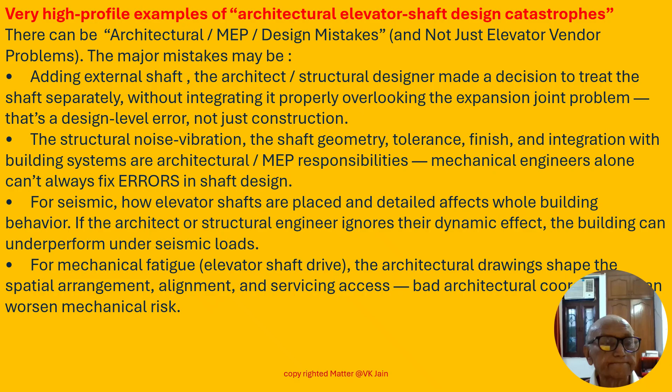Friends, architects, structural engineers and MEP engineers. Architects can also make mistakes. We'll take up a very high profile example of an architectural elevator shaft design catastrophe. The 47-story luxury Intempo Tower, Benidorm, Spain was once upon a time touted as the tallest residential building in the European Union with its 47 stories, a 188-meter tall building. The architects forgot to put enough shaft for the lift.

The notorious mishap was caused by a mixture of greed and incompetence. Now this greed is very important because the owner of the building, out of greed, asked the architects to hurry and start the building. They start collecting funds from different parties and later on, if they don't get enough funds, then they try to increase the height.

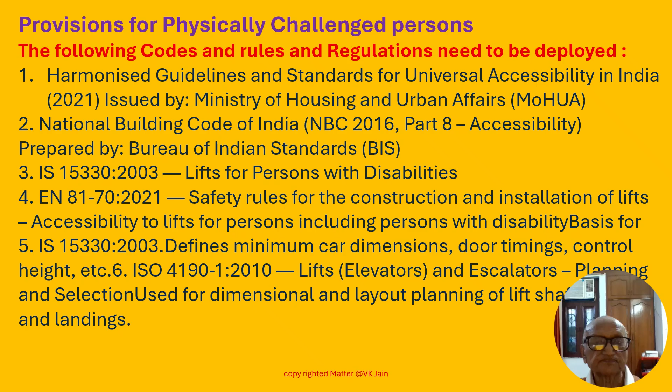Friends, let us discuss one by one what are the provisions for physically challenged persons to be made in elevators. The first one is elevator location and access. In this, we are supposed to consider proximity. The lift should be placed so it is easily accessible from the main entrance, connected to barrier-free routes. The route should be barrier-free because the physically challenged person may have to go on a wheelchair. Approach: minimum dimension could be 1500 mm by 1500 mm clear maneuvering space in front of the elevator door for wheelchair turning.

Third one is level landing. Approaching the lift from anywhere, the landing should be leveled properly. Floor level at the landing and car entrance must be flush, no step or gap more than 12 millimeters. Second consideration, car dimensions, that is cabin size. Minimum internal clear dimensions vary by building type. For residential buildings, minimum car size must be 1100 mm width and 1400 mm depth. Public or institutional buildings: minimum car size must be 1600 wide by 1500 deep for comfortable turning. Hospital and stretcher lift: 2000 width and 1400 depth for full stretcher consideration.

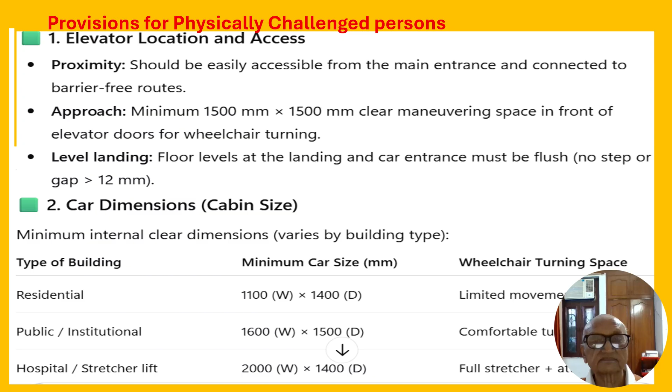Friends, MEP engineers, we are discussing the provisions to be made for a particular lift to be used by physically challenged persons. The third item is with regard to doors. Door width should be minimum 900 mm clear opening to allow wheelchair entry. The operation of the lift should be automatic. Timing: door open and close timing must allow sufficient duration for wheelchair and slow users, minimum 5 seconds. Sensors: infrared curtain sensors are to prevent the door closing during user boarding the lift.

Control panel design. The lift is provided inside or outside with a control panel. There is a limitation regarding the height. Controls should be between 900 mm and 1200 mm above floor level to reach from a seated position, that means for a person on a wheelchair. Layout: a horizontal or vertical arrangement with large tactile buttons, greater than or equal to 20 mm diameter. Tactile and braille: each button labeled with raised tactile numbers and braille. The tactile numbers on the elevator control panel are raised, touch-detectable digits that allow visually impaired users to identify floor buttons by feeling them with their fingers, without needing to see them. By virtue of the Braille system, blind people can feel the numbers, but of course, they must have been trained in the Braille system.

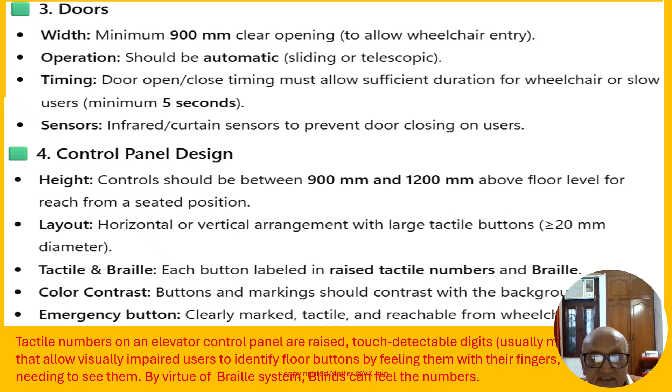Friends, the physically challenged person may be deaf also. For deaf, we have to make auditory and visual indicators: floor announcement, audible voice announcement for floor numbers and door opening and closing. Second, visual display, bright LED or LCD floor indicator inside and outside the car. Emergency communication system, two-way voice intercom with visual indicator showing that help is on the way. Third, fourth item, alarm signal, both visual and auditory alarm.

Next is handrails and support. Handrail must be provided on three sides of the lift, excluding the entrance. Handrail height should be 900 mm to 1000 mm from floor level, or at least on one wall. Shape circular or oval cross section, 30 to 40 mm diameter. Ends should be rounded and not projecting into circulation space. The handrails are necessary to give support to wheelchair persons.

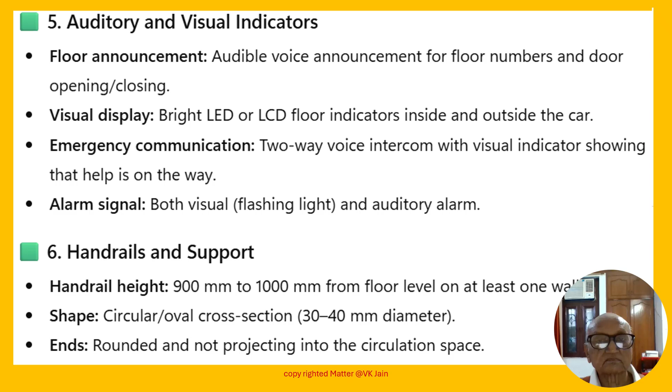Friends, we are discussing the provisions to be made for physically challenged persons. The seventh item is with regard to flooring and threshold. Non-slip surface inside the car, no step between landing and car floor, tactile warning tiles at the landing for visually impaired users, 300 wide strip before the door.

Regarding signage, there should be high contrast raised text near each landing and inside the car. Floor number should be in braille and tactile form. Accessible symbol should be displayed on accessible elevators.

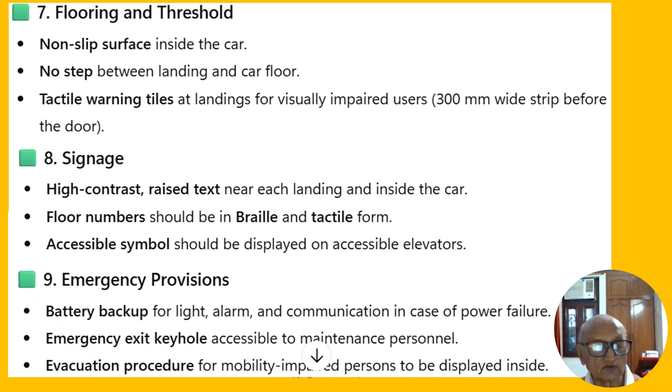Ninth item is emergency provisions. For emergency, battery backup for light, alarm and communication has to be provided so that in case of power failure, they come into operation. Emergency exit keyhole accessible to maintenance personnel. Evacuation procedure for mobility impaired persons to be displayed inside.

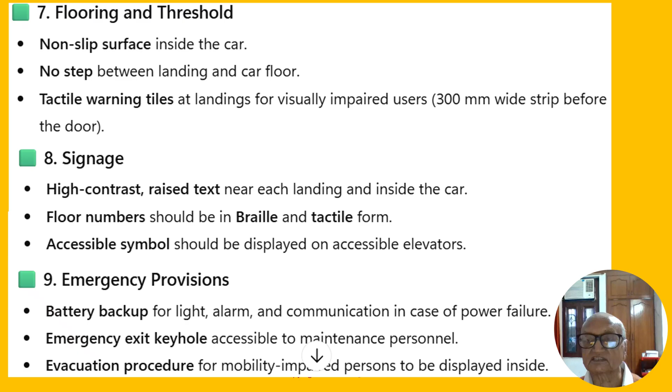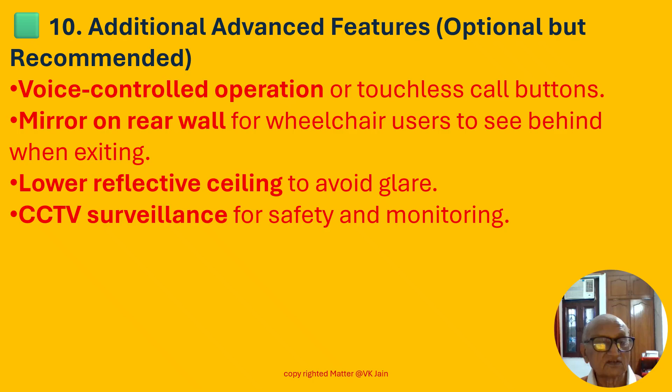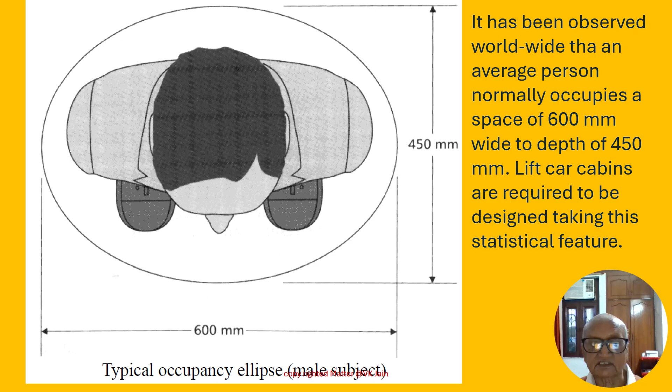This slide shows the space occupied by an average person, statistical average person. Statistical average person all over the world is taken as 600 by 450 elliptical space, although for consideration it becomes rectangular. This is known as the typical occupancy ellipse. It has been observed worldwide that an average person normally occupies a space of 600 by 450 deep. Lift car cabins are required to be designed taking this statistical feature.

There are two major design features of any lift system. They are handling capacity, otherwise known as quantity of service, then interval or waiting time, which is known as quality of service. We will learn this in the third section on lift.

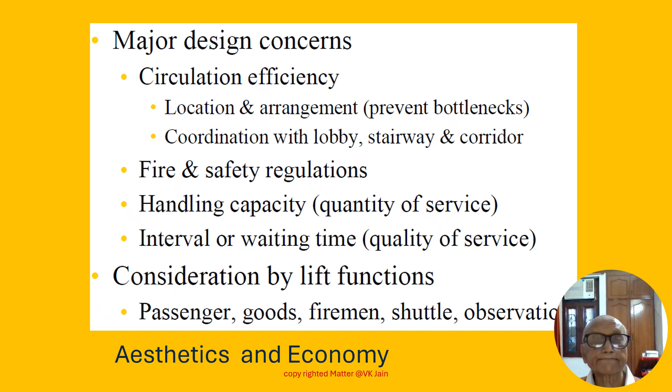This slide shows the energy efficiency apparatus or feature of the lift. We are supposed to provide regenerative type of electric drive. The regenerative drive is the latest upgrade which enables power generation during stopping of the elevator. Unlike conventional drives which heat a resistor while dynamic braking, regenerative drives generate useful power which can be used by other lifts, electrical equipment, or also can be fed back to the grid. At the same time, they are designed to ensure efficient braking of the elevator due to codal requirement.

Also, power generated by this drive has very low harmonic distortion. This system is designed with this feature also. The regenerative drive also offers multiple protection functions such as overcurrent and short circuit protection, over temperature protection, and also abnormal power voltage protection.

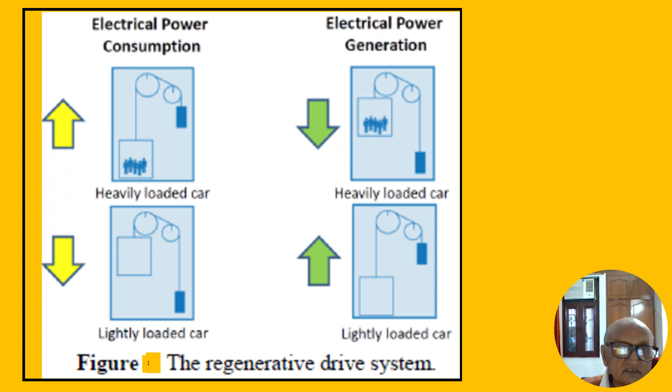Dear friends, this graphical representation compares four different types of lift systems, and each type has three distinct loads for energy consumption. The green one is showing car lighting. The blue one is showing power or energy consumed by control systems. And the third one is energy consumed by machine and drive.

Now let us see the most energy consuming type of system known as hydraulic system. The second one is a geared system, which is better with respect to the lift passenger not getting jerked during travel, but energy-wise it is second highest.

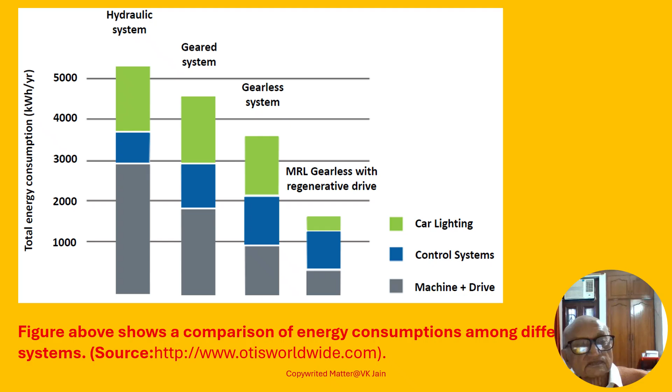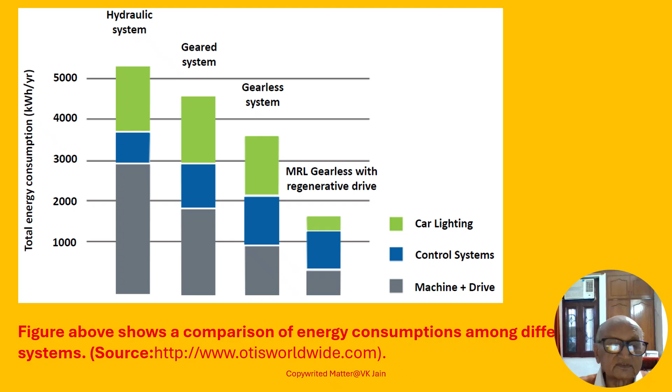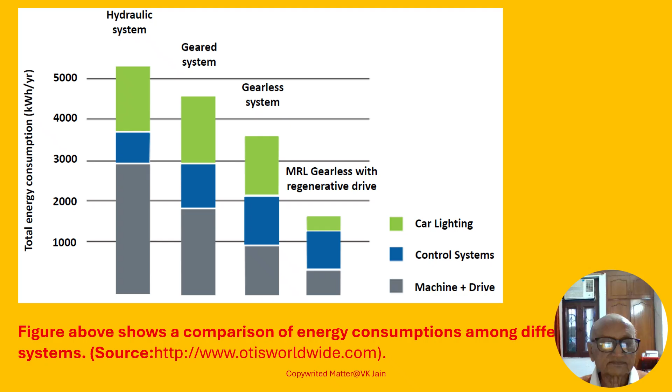The National Building Code 2016, to be revised as 2025, in its Volume 2, Part 8, Section 5 - installations of lift, escalator and moving walks, 5A lift portion only - provides a very essential feature of fireman lift. As you know, in case of major fire, if it is established as a major fire, one of the lifts is taken over by firemen for moving from one floor to another for their operation purpose. That lift is known as the fireman's lift.

The fireman lift shall have the following minimum requirements. The lift car shall have a floor area of not less than 1.44 square meters. It shall also have a loading capacity of not less than 545 kg, that is 8 persons. Lift landing doors should have a minimum fire resistance of 1 hour. This is essential because during heavy fire, the door must not start burning. The third feature is the door shall have an automatic operation for car and landing.

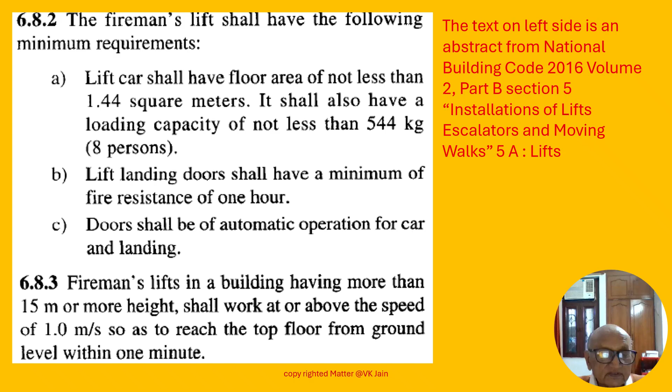Fireman lift in a building having more than 15 meters height shall work at or above the speed of 1 meter per second, so as to reach the top floor from ground level within 1 minute. This 1 minute is important.

This slide describes some other features of fire lift. Wherever applicable, fire lift shall be provided with a minimum capacity of 8 passengers and it should be fully automated, and provided with an emergency switch on ground level. In general, a building 15 meters in height and above shall be provided with a fire lift.

Second, in case of fire, only firemen shall operate the fire lift; in normal course, it may be used by other persons. Third feature: each fire lift shall be equipped with suitable intercommunication equipment for communicating with the control room on the ground floor of the building. And the fourth feature is the number and location of fire lifts in a building shall be decided after taking into consideration various factors like building population, floor area, and compartmentation area.

However, every 1200 square meters of useful space should be provided with a fire lift.

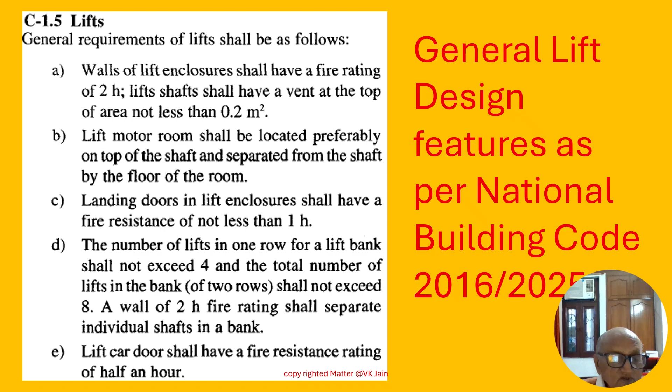We are discussing the provisions to be made as per National Building Code for the various types of lifts.

The fifth feature is collapsible gate shall not be permitted for lift and shall have solid doors with fire resistance of at least 1 hour. If the lift shaft and lobby is in core of building, a positive pressure between 25 and 30 pascal shall be maintained in the lobby and a positive pressure of 50 pascal shall be maintained in the lift shaft. The mechanism for pressurization shall act automatically with the fire alarm. It shall be possible to operate this mechanically also.

Let me understand that National Building Code or any other code in India is provided with internationally accepted unit system, known as SI system. In SI system, the unit of pressure is Pascal, and 100 kilopascal is roughly equal to 1 atmospheric pressure, just to compare.

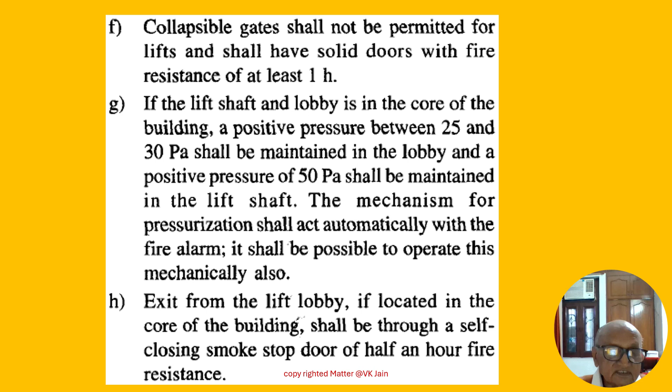Friends, we are discussing the normal provisions to be made by virtue of National Building Code 2016 getting revised as 2025.

The next feature of such lifts shall not normally communicate with the basement. If however lifts are in communication with the basement, the lift lobby of the basement shall be pressurized as given in previous feature, with self-closing door as previously mentioned.

Grounding switches at ground floor level shall be provided in all the lifts to enable the fire service to ground the lift. This is a very important feature with respect to electrical design.

As per this, we are supposed to provide a separate electrical switchboard for the purpose of essential systems. One of them is the fire lift. The other features are external lighting, internal lighting in common area.

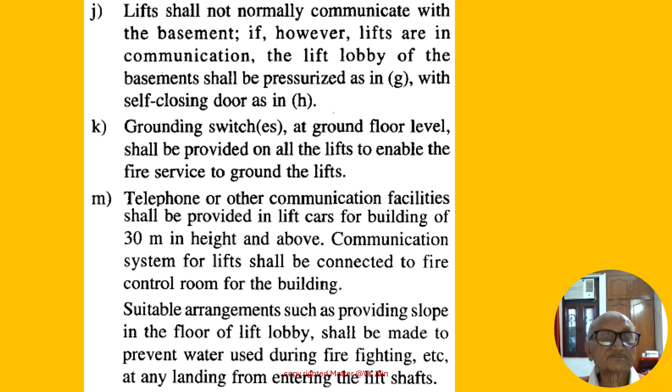Friends, we are discussing the normal provisions to be made as per National Building Code 2016 or 25, as the case may be.

Normally, when we are providing more than one lift in a bank, their arrangement is known as alcoving. This particular slide shows four types of alcoving of lift.

The diagram or schematic shown on the top right shows three number lifts and how they are to be arranged. The diagram on the left hand top side shows arrangement of four number lifts in a particular bank.

The arrangement shown on the left bottom shows arrangement of six number lifts, whereas on the right hand side it shows how to provide eight number lifts in one particular bank.

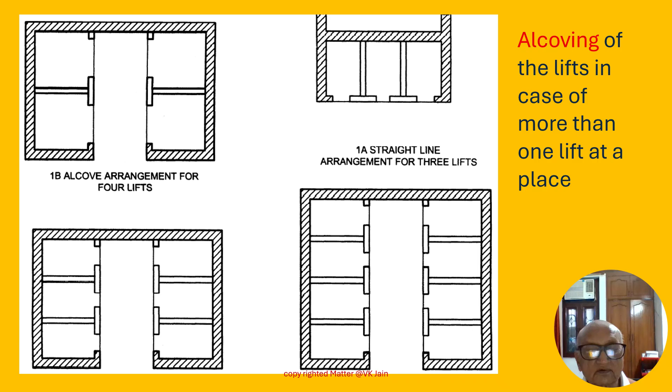More than eight number lifts cannot be provided in a bank as per this code.

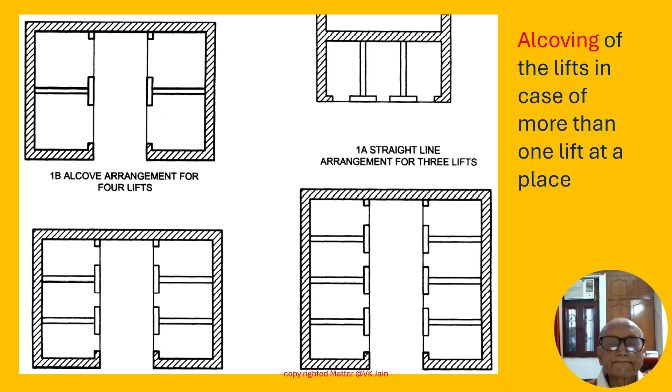Friends, we are discussing the arrangement of lift, 8 number lifts in one alcove, as shown in this diagram. This is a general arrangement for 8 number lifts to be provided at a place.

There is one important feature of this: the floor itself. The floor here is provided with anti-static flooring because the person has to walk from one end to another end. This is a longer distance, and static electricity gets generated. In such cases, to quench that anti-static electricity generated in our body, this type of flooring is a must.

Second feature of this diagram is the architrave. The portion surrounding one particular lift is known as architrave, both sides left and right, and on the top. This is one architrave from here to here.